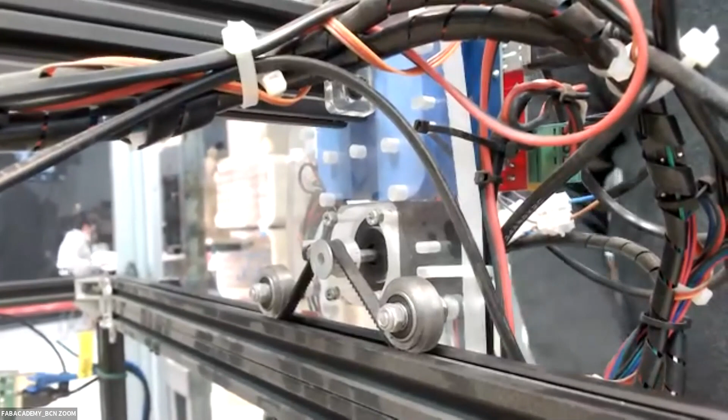So when we move, actually, can we switch? When this guy rotates, it moves a little bit the pulley and helps at the same time to rotate the bearings that, in this case, are like just more like Delrin wheels to move and advance the machine.

This is a system that is good for like a lightweight system, and it's fast for movement and it's quite easy to build.

In this case, we are using this in the mesh of wires just behind. We are using a NEMA 17. That is a standard type of motor.

If you look on the bridge, you can see here the console. We're using an Arduino Mega plus a RAMPS. A RAMPS basically is a shield that allows a lot of connections on the Arduino Mega.

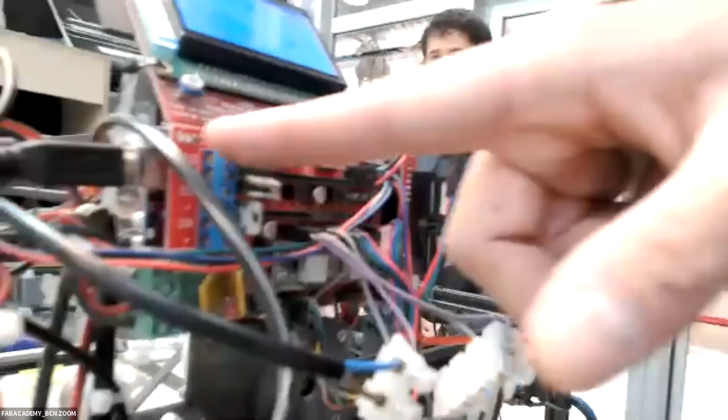This is like a dumb board. It's just a board that has a lot of types of connectors to connect pre-connected things. For example, we have cable connectors, we have multiple cable and power inputs, we have condensers, we have some MOSFETs already embedded to power high power devices, and we have the connectors ready for the stepper drivers.

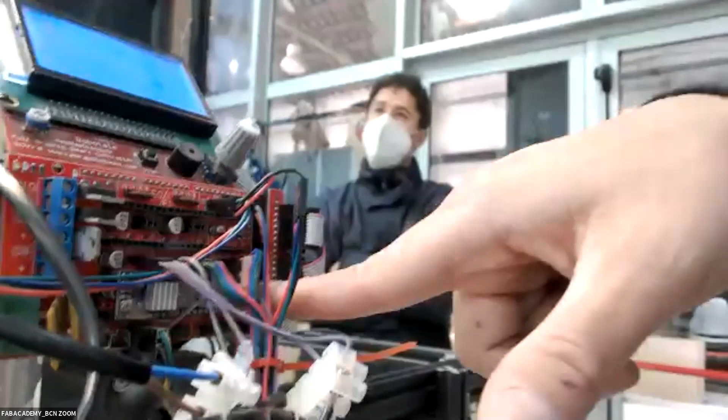In this case, this shield, we can connect one driver, two drivers, three drivers, four drivers, five drivers. It's a 5-stepper motor shield, plus 1, 2, and 3 power MOSFETs.

So basically, this shield is widely used, for example, for 3D printing because we have X, Y, Z, extruder 1, and maybe extruder 2. And we have 3 MOSFETs: one for the heater of the hot end, one for the heater of the base, and another MOSFET maybe to activate a second heater of a second extruder.

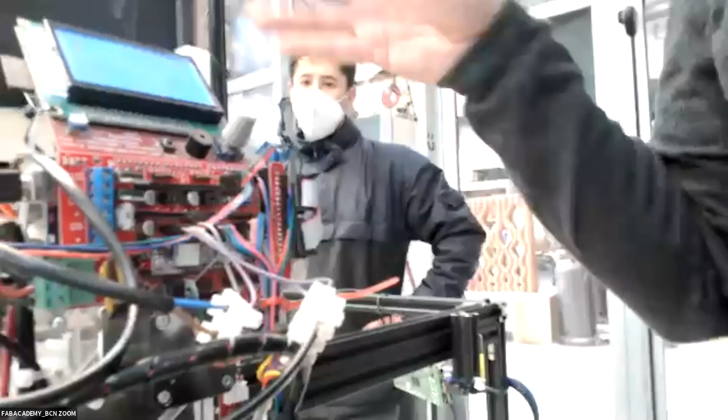So this board is widely used for 3D printing, but could be used for other things. In this case, this machine has only 3 steppers, so we only use 3 of them. And the rest of the connections is for activating different things.

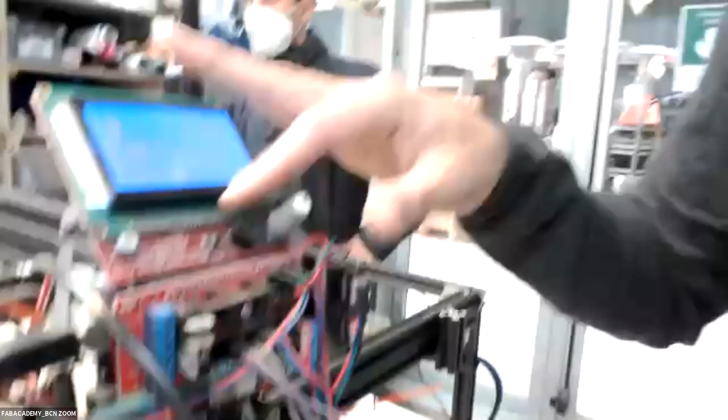We have also an LCD screen to have a kind of nice interface that we connect to one of the connectors on the side of the RAMPS. It's a really modular board, let's say one of the most modular boards to activate things.

You see there is a lot of mesh of wires because we have a lot of wires coming up, because this machine is designed so you are able to customize it and use it as you want. It's a machine that is a Frankenstein right now, so it has everything activated and everything ready.

So in case you want to put a NeoPixel, draw it live, you just need to connect at the end, because we have all the terminals ready for connecting everything. Put it in the code and the machine will automatically launch.

Because we have set on the firmware of the machine, the one that we have loaded here, that we have everything: 5 motors, NeoPixel, servo, everything is activated by default, even if we don't have anything connected.

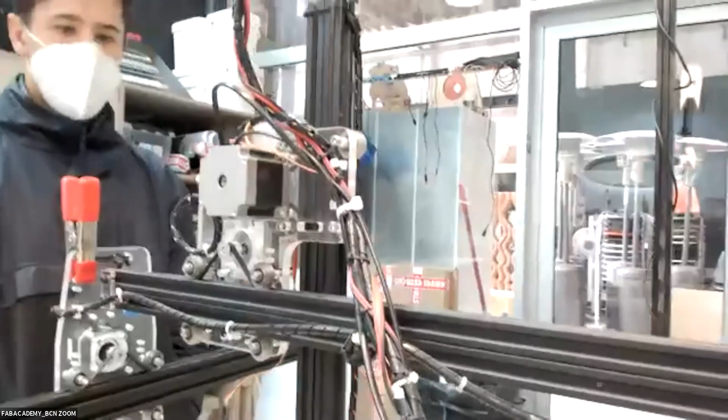You see on the Y and the Z it's the same system, but the difference is we have bigger motors, especially on the Z. Why? Because the profile on the Z is huge, and that means we need to move a lot of torque in the vertical. Usually a NEMA 17 is not strong enough, so we use the next level, which is a NEMA 23.

In this case, we don't have a tool. Actually, what we have is, let's move it. Right now, wait, we need to move a cable.

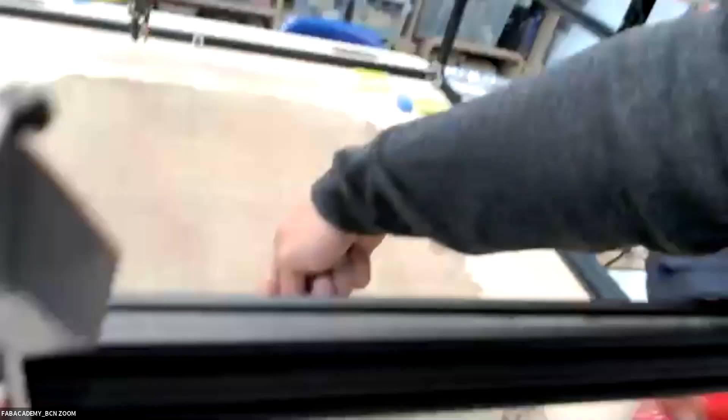So here you can see we have a screwdriver, just the dumbest tool ever, and we used to draw in the sand with it. We have also put this blue thing that's attached to a servo. This is a cleaning tool we can deploy. We move it from 0 to 90 degrees and start wiping the sand. It's really simple and effective.

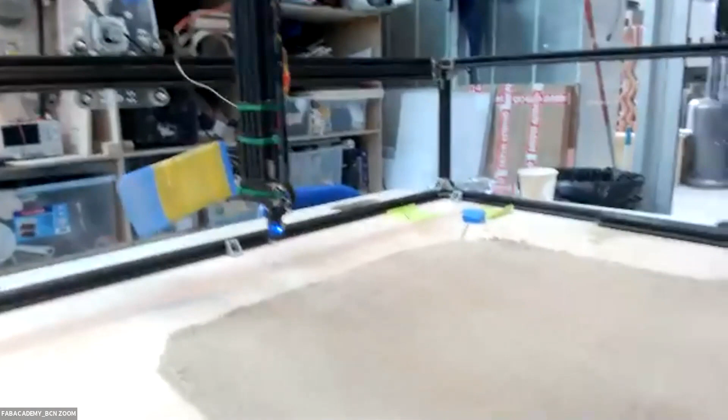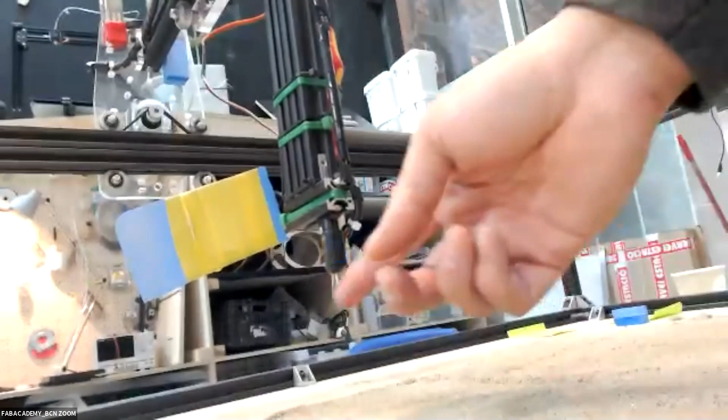You also see on the base this blue blinking thing. Basically it's an automatic probe. You know the CNC where you touch a button to make the set? In this case it's actually the opposite: the button is on the top of the machine and it goes down until it touches the base. We have this little stick that automatically pushes down, touches, and retracts back so we don't damage it.

This machine, we call it the Kraken, because it's like an octopus that is able to grab whatever tool you design. As the Kraken is in the sea, we put sand, so it's the CNC by the sea. Silly name, but we made it.

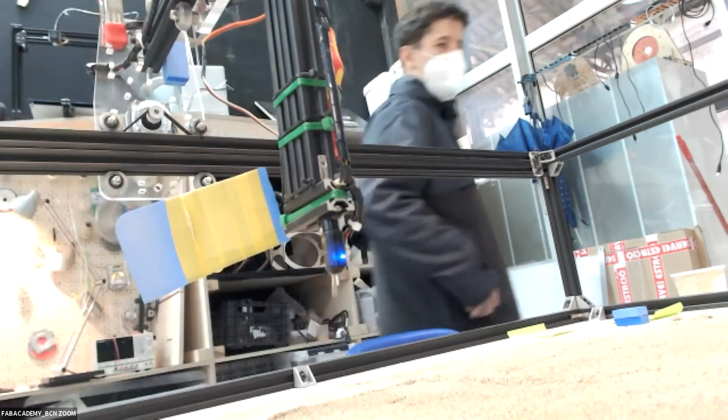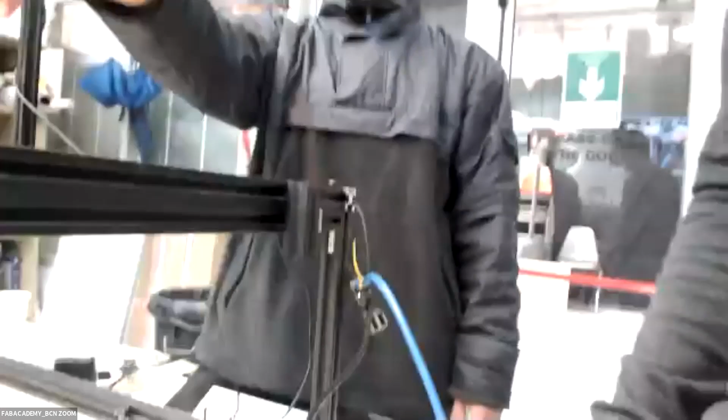This system is connected to a Raspberry Pi with a camera that is streaming. In the Pi there's a small app running that controls the machine. Maybe we can start the screen. Then you see the camera.

You can see the camera as well while you're moving the machine. This is the interface. You can control the machine with some commands on the left, then see what you're doing down here in the camera. I'll show you how you can open that camera up a little bigger. You can upload G-code here and test some extra things.

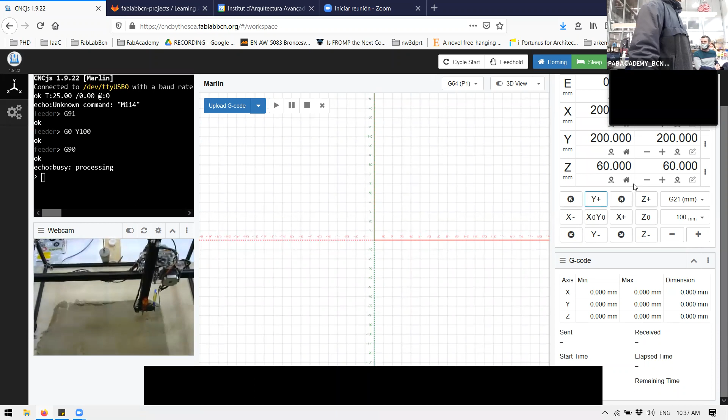As we are using sand, it's a soft surface, so do we need to be careful with it if we go farther? That's why we have this, to make the probe in the air so we don't put the probe inside the surface. This is the homing point, and the probe will touch this surface like a test, because the sand is uneven.

So more or less this interface controls the whole thing. Cameras are in here, you can upload a G-code and it will execute it for you. If you want to reproduce this, first you can access this — it's called cncbythesea.fablabbcn.org, and then there's a login.

We'll put the login in the chat so that you can find it, since this is reachable for remote students too. Right now, this system, last year, we tested with volunteers up to about 20 connections at the same time — actually only one was controlling the machine each time, because it was recognizing all the G-codes from everybody. We don't know exactly how much it will handle with all the connections; sometimes the Pi overheats and tries to slow down the system. At the end, the limitation is that there's only one machine, so you can just control one.

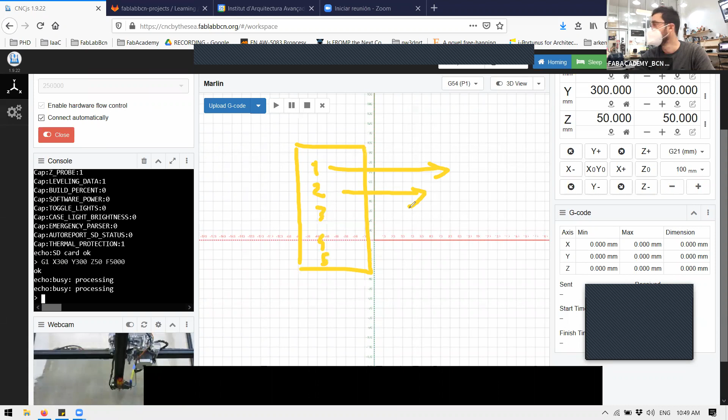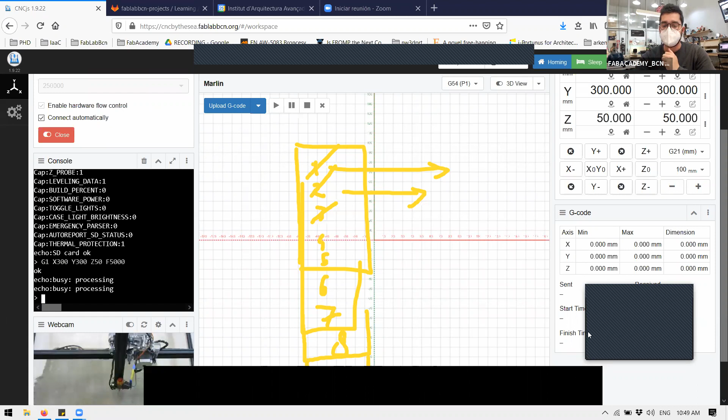That's one of the main reasons why, for example, when we send a stop command - it will not stop until it finishes the rest of the list of orders, because it's following the list of commands. Your stop command is just another command in the list, so it doesn't stop until the list of commands finishes.

In some machines this might take longer or shorter, depending on how large the command is. Some commands might cross the machine completely, others are small, so we perceive them as shorter. For example, a command moving the machine 500 millimeters takes 2 seconds, while moving 5 millimeters takes half a second. So it's about perception of what the machine is doing - actually, the machine is always following the instructions.

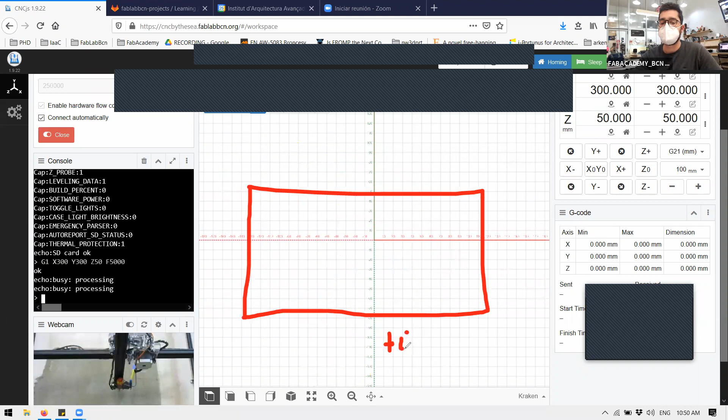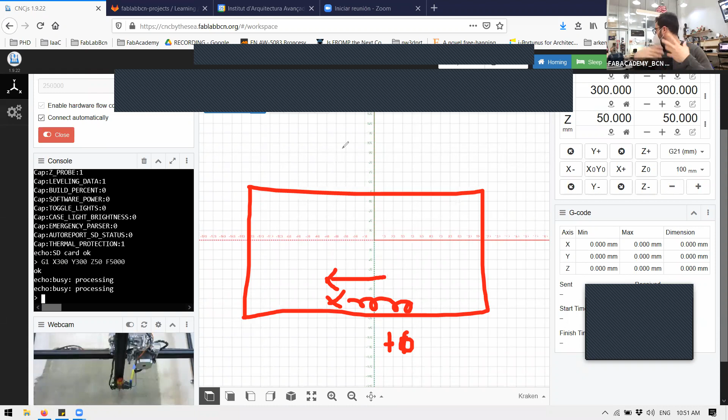How does the machine know when to load the next command if it doesn't know the actual position and is just activating the motor? In the firmware, and also in the G code, we have default values that we can override with G code. Say feed rate is 2000, or let's use simple numbers: F10 and acceleration 10. That means if we want to move X10, how long will it take to move 10 millimeters if moving at 10 millimeters per second? One second. So it does time estimation based on the speed and acceleration, calculating the actual time it takes the machine to reach that position, because it knows the acceleration, the speed, and the total amount of movement, so it can know the time.

When we are in command number 1 and the second has passed, it automatically launches command number 2, thinking that the motors are no longer in use.

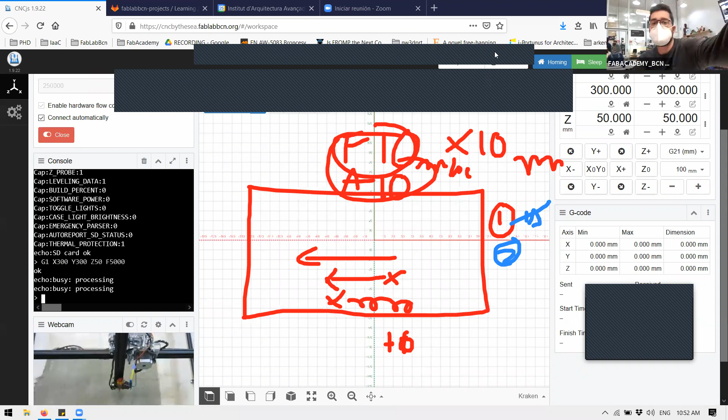That doesn't always happen correctly. What could happen, for example, is something like this. Let's do an example. Can I move this with this? Not really. Let's clear this. G1 X400, F10,000.

This happens, I just made a collision. The machine actually thinks it's in position 400, but meanwhile this is in the same position. The machine doesn't know, so we lost the origin. Relative to the machine, since it thinks it's in that position, not here, the origin is not here anymore, it's over there. The machine could actually collapse, and that's what you always want to avoid.

In this case, we just made the machine do this to demonstrate, so it's a learning machine and it can do this kind of thing.

In case the machine hits something, it just makes noise because the motors are trying to keep the position in place. So basically what we are doing is moving the motor manually because we are stronger than the force the motor is applying. When you hear the steps going tack, tack, tack, that's us losing them. In motors or machines, that's called the machine losing steps, and it happens a lot when the machine is not acting correctly mechanically.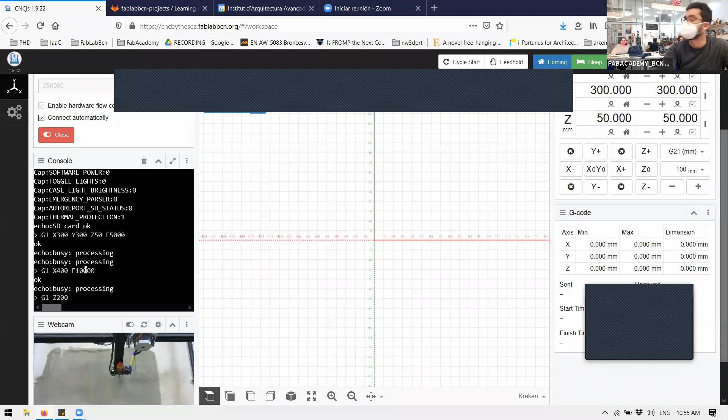G1 Z200. You'll see right now I didn't set up the speed, so it will inherit the previous speed. Ooh, that was close.

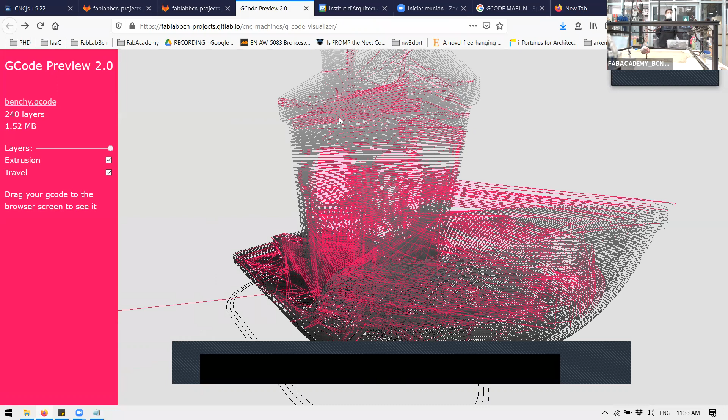Actually, also last year we made a G-code visualizer if you want to check your G-codes. Here, guys, in projects, learning, actually in projects, you go up, this is our repo, CNC machines. You have a G-code visualizer, we made a simple visualizer interface that basically you upload a G-code and it shows you the commands in color, red traveling G0s and G1s in gray.

And in case you have layers, it shows the layers. If you want to check, if you have a G-code file and you don't know exactly what it is, you can visualize it. Still, the software here does it quite well already, with a 3D view, yeah.

Yeah, no, I think it's bigger, but I don't remember the size.

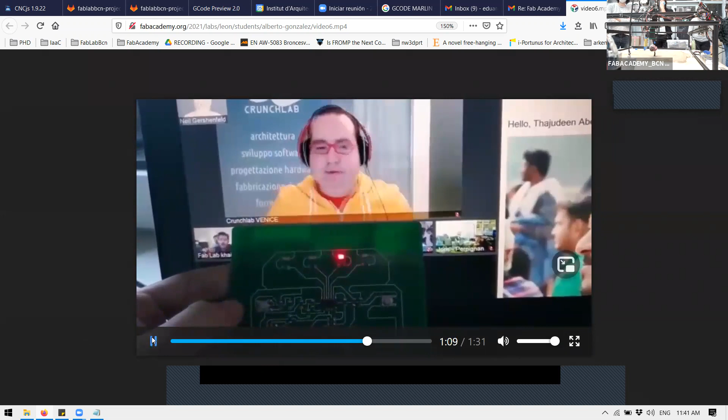Okay. Side comments. Um.

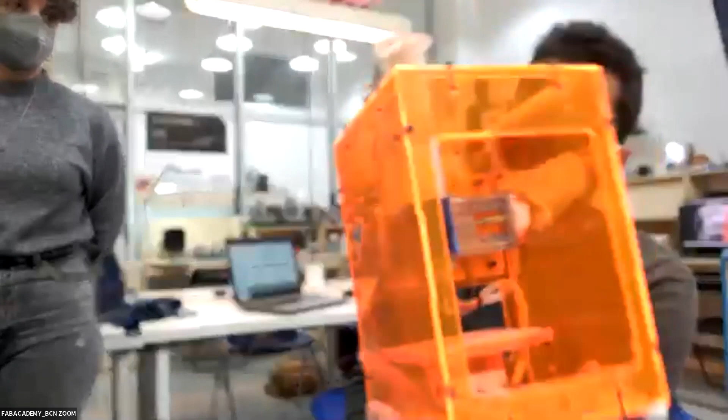Okay. So, SPML. The 6-pack machine came up last year. During confinement, we had a lot of time at home, and we tried to make it as cool as possible. So we went for the idea of designing a really small machine, actually the official name is 6-pack milling machine because it's the size of a 6-pack of beer. But it's like a simple personal mobile lab. So basically it's an ultra simplified machine that is not good for anything.

But it's good for learning. Accuracy-wise, you cannot mill plastics or wood, but you can mill whatever you find at home, like a piece of foam or a piece of soap. And the point here is to learn how to build a machine, let's say the same as an industrial machine, but reducing the tolerances, like the price and everything. Conceptually it's still the same.

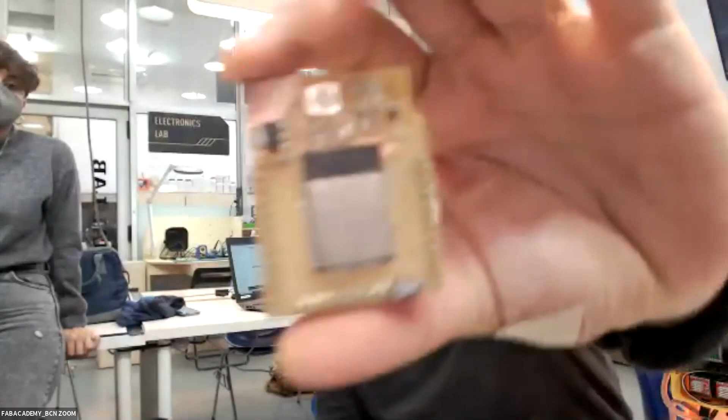We have axes that move with steppers. We need to configure exactly the same things. The firmware that runs inside is exactly the same. So Oscar did an amazing job designing the electronics. And last year, we made a big move on the electronics, and we tried to produce these custom boards that are... let me show this in big speaker view.

Okay, I'm not a speaker. I don't know why. Pin.

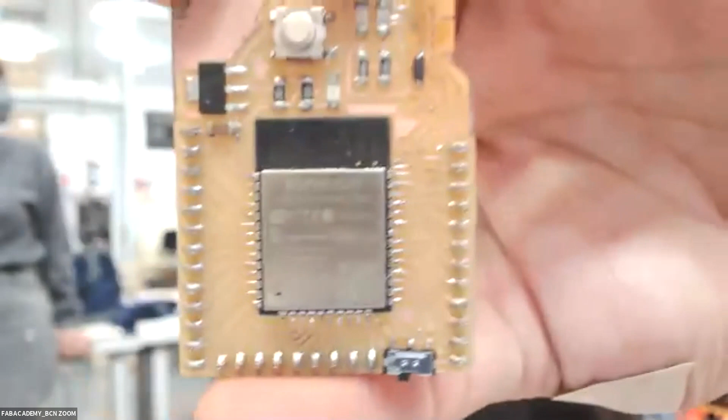Okay. Yeah. So this is ESP, and we basically made it as modular as possible, and we designed a microcontroller shield. No, it's not a shield, a board that you're able to connect to everything. So basically it's ESP that has all the pins ready, like an Arduino, but inverted. We enable some buttons for programming, a voltage regulator, some LEDs to let you know what is happening, and a button and a slider to program it. So it's fabbable, and we sent a lot of them to manufacture.

So it's the same one, but we send it to manufacture the PCBs, and you can solder them yourself. So you have a lot of these in case you want to produce your own, or you can make it completely fabbable. It would be nice if you can produce both, and have 2 mini powerful super Arduinos with Wi-Fi and Bluetooth that you might use in your final projects, or just have it for fun. It's really nice, really powerful.

And we designed a shield for machines. We designed a shield for making blimps and RC controlled cars. As you have all the pins, you can design whatever shield you need for it, and you still have a really powerful processor.

Together with that, we designed a board that you can actually connect it to. That is this CNC shield. The same machine uses a ramps that is quite a generic shield. We designed this expansion board. Let me focus. Okay, here. So basically, this is a board that allows you to connect up to 3 stepper drivers.

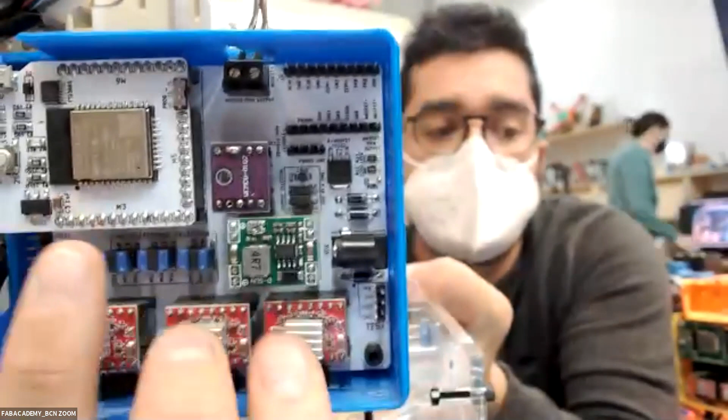That means we can connect 3 axes. We have a voltage regulator, here, to manage electricity. So it's a mix of standard industry boards like these stepper drivers, this power regulator, and a shield that is custom, that we designed to fit in most of the educational programs that we do, and allow you to control small machines, etc.

We also have this logic level converter. We will go into this in the output and input week, because it takes a little time to explain what this component is. And we have a MOSFET to connect, for example, a spindle motor, a DC motor, the same as the milling machine, a DC motor.

And we have a lot of pins ready to connect future things like end stops, fans, water cooling in case we want, etc. So we have a lot of free pins, in a lot of different connections, and we have the same as you might find in any board that you can buy, like a ramps or a GRBL shield, but designed for the ESP. That is a way more powerful platform.

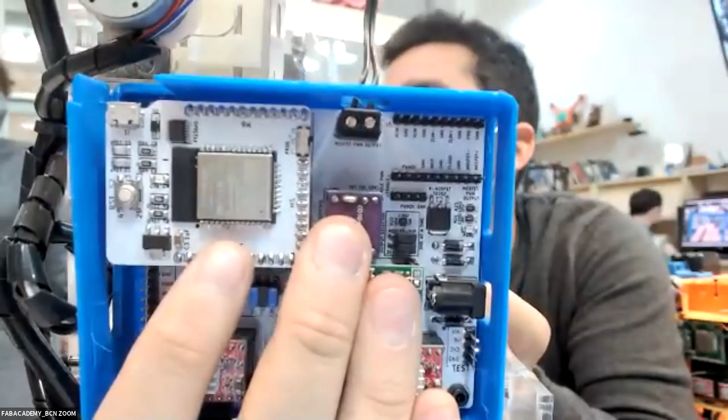Right now there is a big movement in both Marlin and GRBL to allow support for these newer processors, because they can compute faster, they have more memory, and they can do things in general better. Based on that, we started this project, also because we found a fork of GRBL.

GRBL is, I will show you by sharing the screen. Sharing screen. Yeah. GRBL. So this is the repository of the firmware that you can download, and it has an upload guide and everything. For example, usually this one is the ATmega, the Arduino Uno microcontroller and the Arduino board, and it gives you instructions and what the new improvements are.

So some people were interested in using the new kind of microcontrollers like the ESP or SAM controllers that are way more powerful, and they made a fork that enables those firmwares. So you say, okay, we have GRBL that is a super steady platform, super good. I mean, it doesn't have as many options as Marlin, but every time there is an update in GRBL, it's because it has been proven that it works really, really reliably. So we have a really steady software that we can run in the microcontroller, so we designed everything around it.

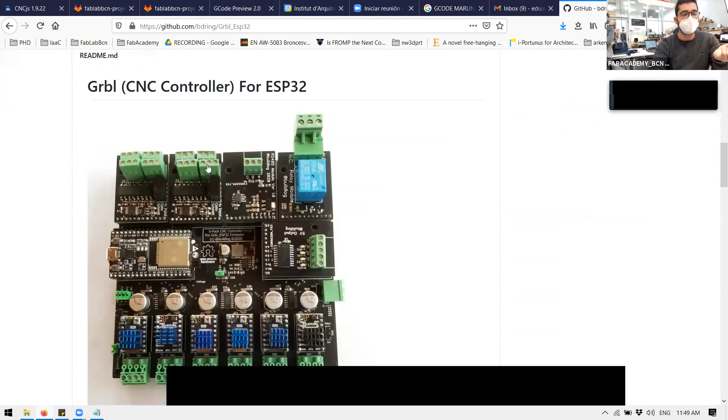So it's called GRBL ESP32. It's a port of the GRBL firmware, and this guy also is doing this kind of the same thing. There are two guys that are doing this. They are doing the same, designing their own custom shields, because actually they don't exist in the market yet, but they will exist. And actually, this guy sells the shields right now.

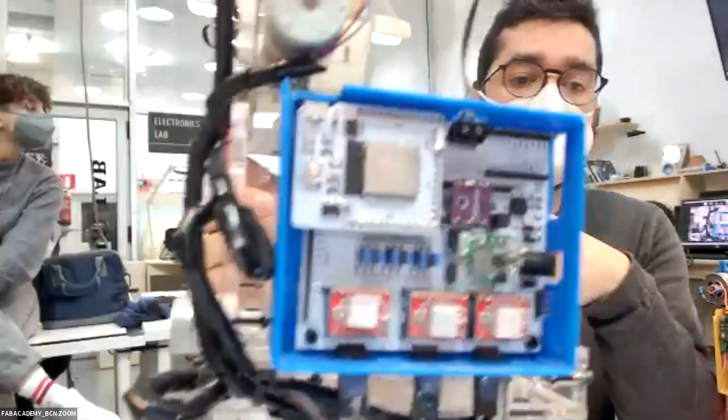And so this software, you just flash it once. We use Arduino or something like this on the board, and then once it's flashed, it works. Exactly. So what was the reason for using this instead of the standard one, which is Arduino with a shield?

First, we can control it through Wi-Fi. So we just need to power it and we can work with it through Wi-Fi. We can send commands the same way that we were doing right now, wirelessly. We can also control through Bluetooth. There are phone apps that control GRBL via Bluetooth. So you can use it the same as the CNCjs, with the little commands to actually move the axes, etc. We can do the same with the phone. So it's really powerful, and in the future everything is moving in that direction, or we hope so. Right now, it's actually moving.

The point right now is we don't want to take too much time on your machine week assignment, but we give you different options. We have CNC shields, Arduino ones, and RAMPS to control your electronics, so you can make your own, or you have the Barduino ESP32 shield that we think is really useful, and you can also use it for your final projects later on.

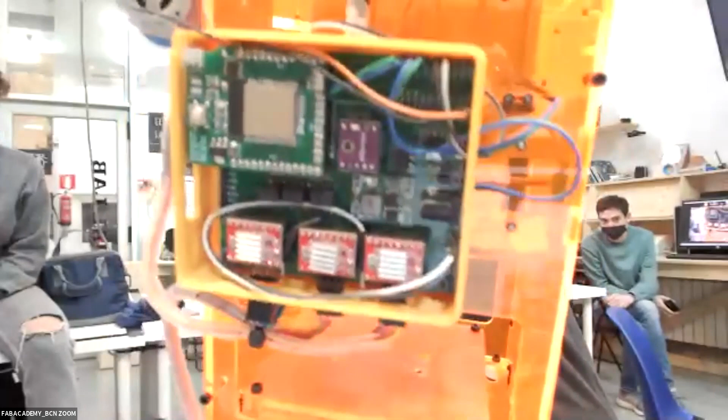Or at least the brain, because this one is swappable, you can just connect and disconnect. Actually this one I think we just take from somewhere else. You can see this one is green because it's the big one that we just manufactured. We found some issues, like the cable was not perfect, we also made mistakes like routing was not perfect, and we were missing some diodes. So we produced a V2, which are the white ones.

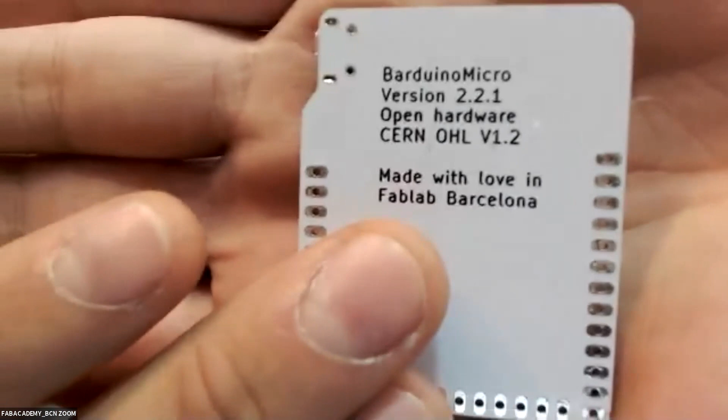Just put your hand behind it. Yep, so this is the 2.2.1.

So actually we have a lot of them, and you have the shields, and they are there. To make it easy, all the components are marked on top of the shield. Oscar did an amazing job labeling everything. So we need to assemble it, you just take the shield and start opening the boxes and solder and put it in place.

As this is a dumb board, we don't need to program it. The only one we need to program is the Barduino. This is a dumb board, okay, it doesn't have any microcontroller. This got a chip on the board, the ESP, and there's another small one. What is it? Is it FTDI? Yeah, it's FTDI, okay.

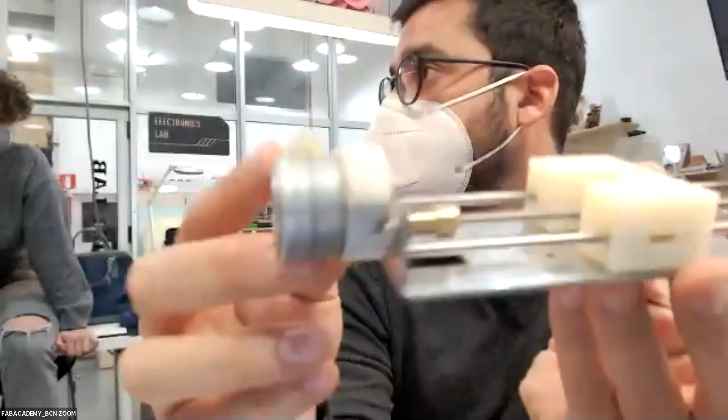For making this machine, we want to simplify the process of building a machine as much as possible. We found these small rails, a made-out rail that works out of the box without costing like 200 euros. So basically it's a stepper motor, as you see, a really, really small stepper motor. This kind of stepper motor is the one you find inside your DVD readers, Blu-ray readers, etc., with a little gearbox to increase the torque a bit, because the power of this motor is nothing, it's just to move a CD drive.

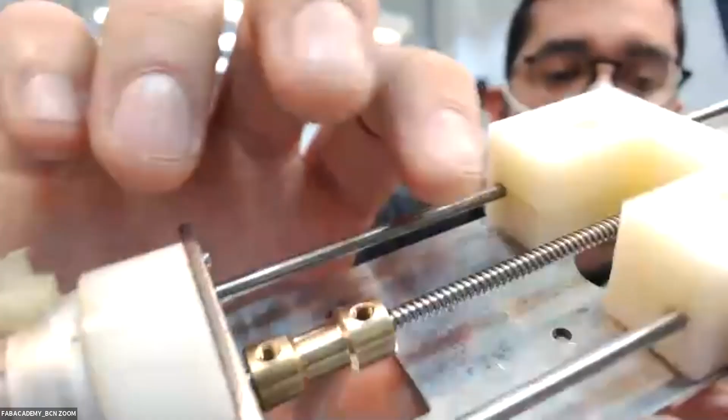We have a little lead screw and a coupler to connect the lead screw to the motor axis, and we have the sliders. As you see, this is simplified, we don't use bearings, they use something like Teflon, we don't know, maybe it's Delrin or nylon, to slide and reduce the friction. So it works out of the box the same as the axis works in the CNCs or the bigger ones, but in a more economic format.

The worst point of these ones is they simplify and make it as cheap as possible. For example, we have backlash, we don't see it really well, but we have like 0.5 millimeter movement in both directions. That's why we say it's not good for making PCBs or milling hard things.

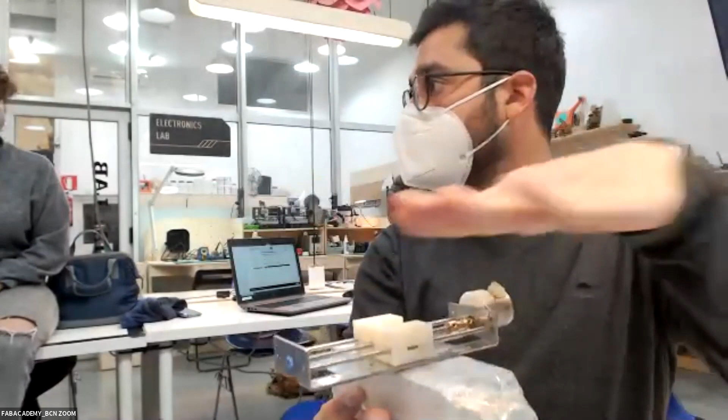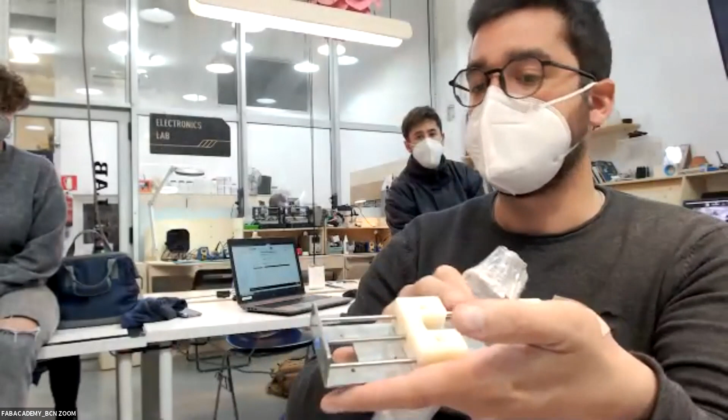On the hardware side, basically, as you have a rail ready, we have a few of them here. Well, these ones are wrapped, but they have holes that are pre-made, and you can start gluing them together or screwing them together to make a platform that moves X and Y. If you connect another one, you have Z. If you go to last year's documentation, you can see the different students combining them in different ways. For example, you can have 2 for the X and have a flat platform, like a big sweeper, but usually the movement is only like 7 to 8 centimeters in the length of the rail, which is quite small.

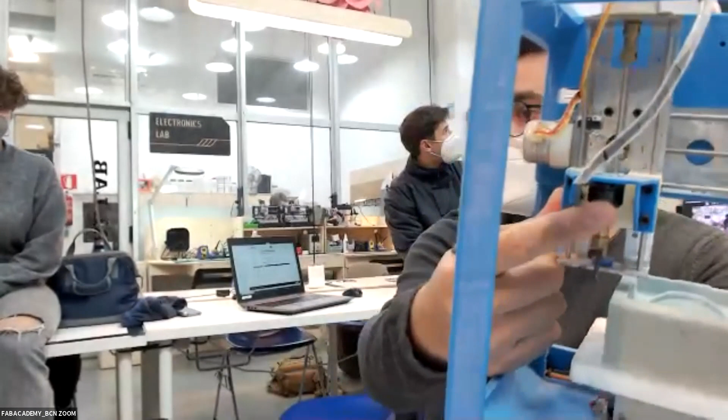Also, as there are small motors with low power demand, we don't need a power supply, so basically we're using a small power adapter, like a laptop charger, to power the whole machine. This one, for example, uses a small brushless motor, but we can also use a DC motor, or in this case, it's using a DC motor that's an air pump that produces pressure to actually push through this syringe.

For example, this is last year's David's one, he just made an adapter to combine the 3 axes to light paint with LED. This is an infrared sensor, so the moment the camera starts taking the picture, it sends an infrared blink, this gets it, activates the playback of the file preloaded on the machine to start lighting up the LED based on the G-code commands. So it's a light painting machine.

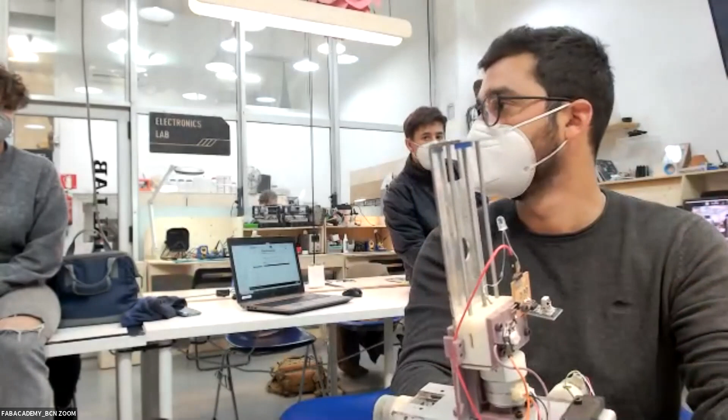This CNC shield has also an SD card holder, so we can store G-code files inside, same as you would in a 3D printer. In general, something like GRBL doesn't allow this, but moving to the ESP32 allows this kind of expandability.

The ESP32 has enough memory to store G-code, even without the SD card. We can, though it's not recommended, because we're using a lot of the memory, including to store the web page used to control it. So we don't need any software, basically we have access to a website.

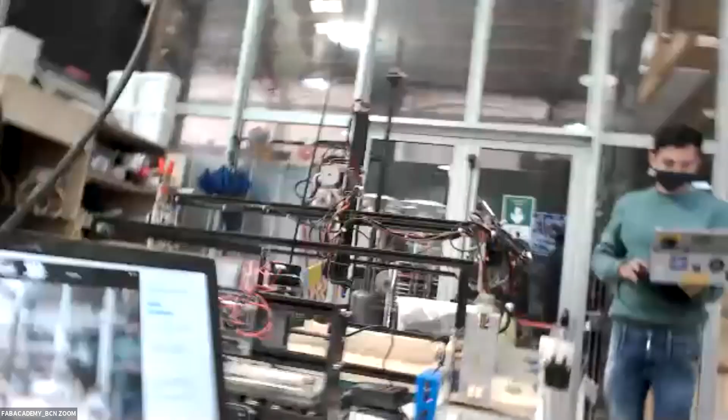It's on, and Joseph is going to connect, and we're going to zoom with his camera. Joseph, can you connect? You don't have to do anything, the idea is this gives you a better view.

If you want to improve the electronics or make new designs, there are people doing 5-axis machines, people doing light painting, whatever. It's a boilerplate we experiment with, but we can keep using it afterwards, we can take it home, that's the machine.

For right now, what you do is just connect, like change the Wi-Fi network. The moment it connects to the Wi-Fi network, the browser automatically opens and launches this web page. This page is actually stored in the Arduino, inside the ESP, so the interface of control, the G-code sender, is also stored inside the machine. We don't need anything extra to connect to it.

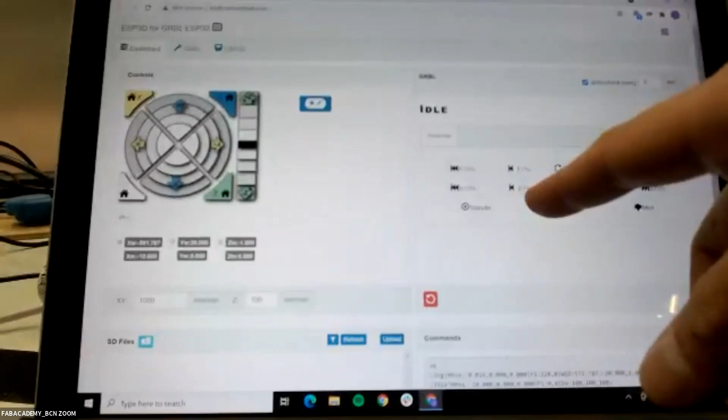We can also connect to this interface through the phone. If you connect to the Wi-Fi, you can connect via phone and control it as a web page. It's a similar interface to the one you were just using with the Kraken - we have the commanders, mainly dedicated for CNC, quick touch overrides, and the G-code commands to send.

And we have the SD card files - let's try to refresh. No SD card detected. We have here the files that are stored on the SD card of the machine right now, so we can try to move it.

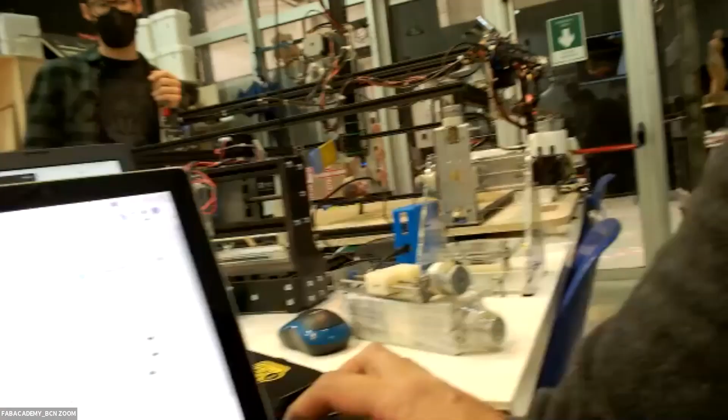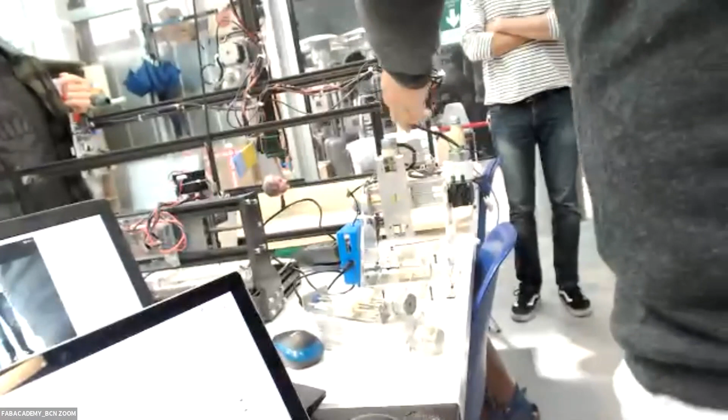This one is slightly more clean because it's all 3D printed, and it's actually meant to be 3D printed on the Ender, so it's in 2 parts. We can show it in the repo, it's easier - let me share my screen, or I can show you.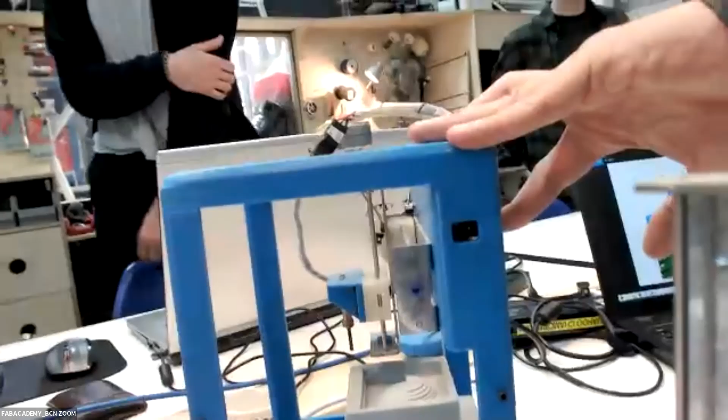It's meant to be assembled 3D printed in 4 parts, 4 big files that you send to print, and you can wrap it. In this case, the electronics are hidden on the back. This takes about 2 days to print since each file takes 12 to 14 hours, but you don't need to worry - the other one is just 3 minutes of cutting.

Depends on what you want to do - this one is bigger, this one is smaller. This one is easier to customize than that one. But the working surface is exactly the same, 70 by 70 by 30. Ridiculous, but enough for example...

Yesterday, Arman transformed it into a kind of 5-axis machine, adding 2 more steppers. You're asking, how?

Does it work? This, yeah, he moved actually.

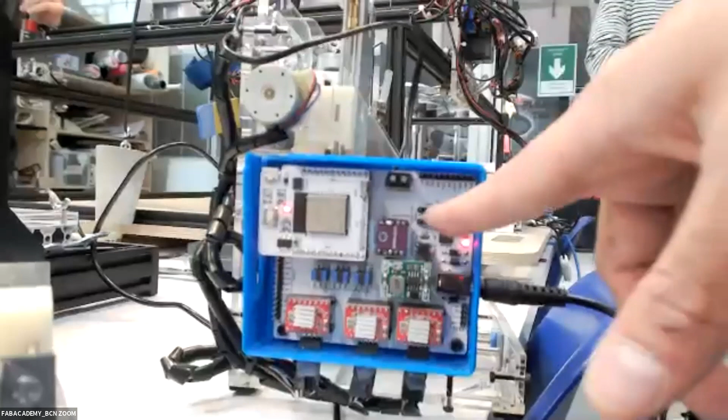The problem was he couldn't generate a file for a 5-axis, because generating 5-axis is quite complex. The problem was actually how to make a file. So we have only 3 steppers. So what he did is use the other leftover pins to make his own shield with 2 extra stepper drivers. I don't know if you can see it.

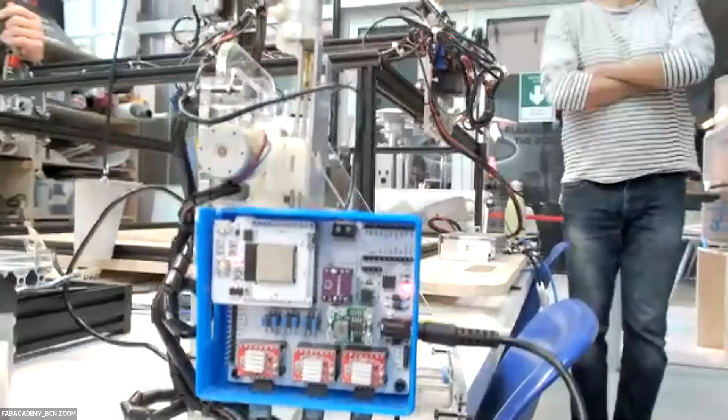That connects to the expansion board of the expansion board.

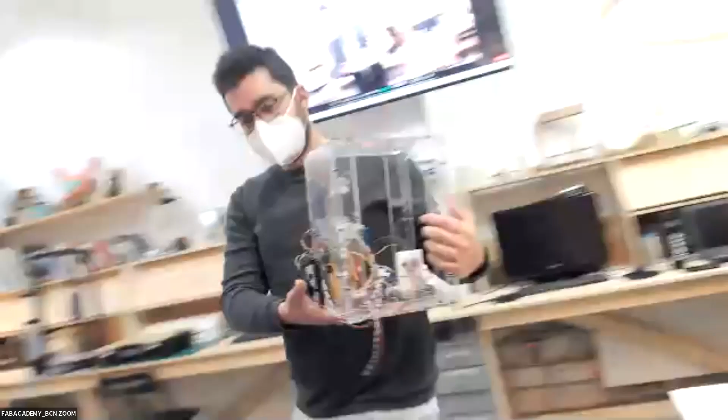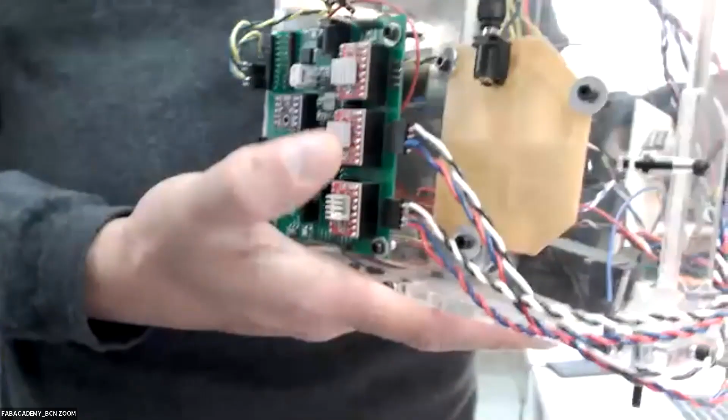So this is the board, and he expanded to this other board. You see, it's a mess of cables because he experimented with a lot of motors and testing. But where do you, how do you connect to the other chip?

In this case, he went into the firmware.

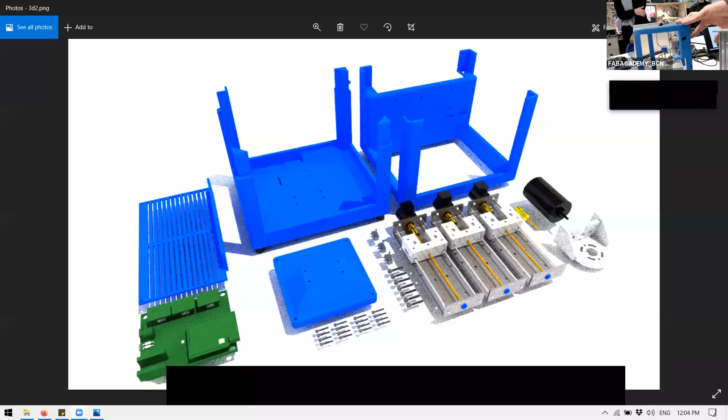You have a lot of files for configuring the firmware. We have one file to read the files for the SD card. We have one file for the limit, the end stops. But in general, it's way easier to configure them.

For example, we went to the machine, and this is for a 3-axis, 5-axis setup. This is where we set up the definition of the pins of the machine. We say that pin number 25 is the one that controls the direction of the X motor, pin number 26 controls the direction of the Y motor. So we can always change these configurations.

It's about the same as you activate an LED. You can say, no, it's number 20, it's number 21. So here we have the definition. It's the same, the machine definition.

In this case, we made our own for this Arduino because we designed the board completely. So we say that X is connected to GPIO number 12, Y is connected to GPIO number 14.

So what Arman did is, instead of using coolant, he just put axis A on pin 21, axis B on pin 16. So he changed the pin definitions to expand it.

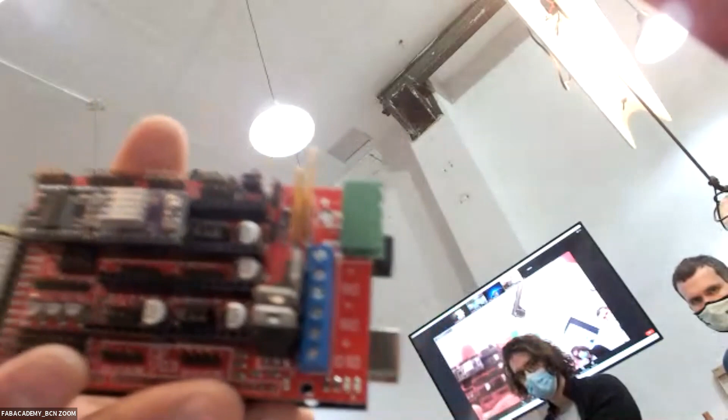For example, newer generations of these guys are something that right now is changing in the Prusa world. We have what we call the SilentStepStick. You've noticed that the Prusa MK3, yeah. These are the shields. These are the RAMPS shield, and this is an Arduino GRBL shield.

So right now there's a movement because these stepper drivers are becoming better and better with new microcontrollers, already with firmware that you don't generally need to change. But could you modify it? If you want, yes, but I don't know anyone yet that has done it. It's doable though.

So these guys have become better. For example, Prusa uses the new generation, like the MK3. If you hear the MK3 working versus the MK2 which uses the old one, the biggest change is the level of sound. One is like this, and the other one is like that.

For example, we use the purple ones. In general they are the worst ones, but educational-wise, if you make a short, they tend to not break. As simple as that, because they are more robust, but they make more noise. That's why this machine makes more noise than, for example, the 350, because we use the purple ones that are more resistant, even if slightly older.